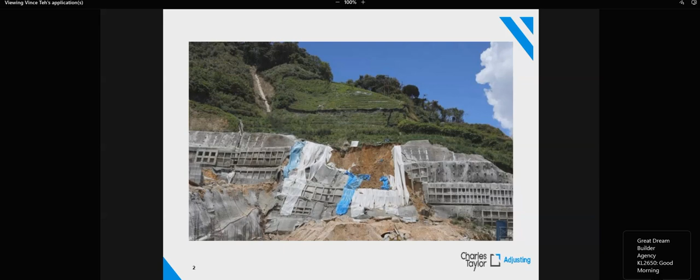Before we start, I'll show you some common engineering failures, construction engineering failures, so that you're familiar. I'll run through examples of CAR losses, then we'll go to the dry part where we explore the policy wordings, and go through some common clauses which your claims department would like me to highlight in the event of claims. I've taken out the case study because it's a bit too long, and the claim handling procedure as well. So we'll stick to the general, very introductory session on losses and policy wordings.

As you know, the weather nowadays in Malaysia is really wild or crazy. It's predictable in the sense we know it's going to come, but unpredictable in how massive or frequent it will hit us. Proper precautionary measures need to be taken. As a consultant and contractor, all these design considerations have to be taken into account. A lot of the time, consultants or contractors use back the standard design from 20 years ago, which might not fit current weather conditions. That's when things go bad.

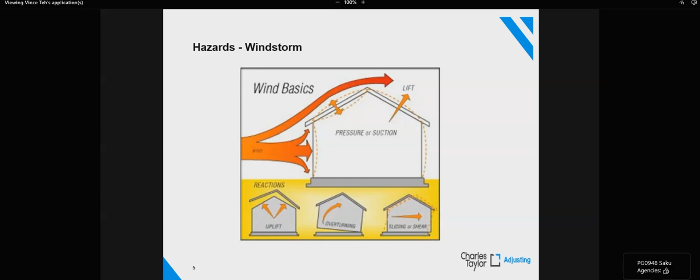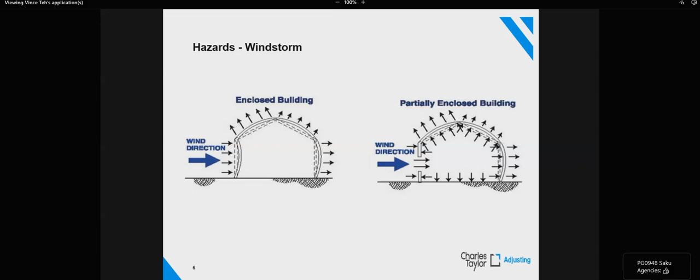Now, for a proper windstorm, this is the theory behind windstorm damage. If you have a closed structure, a completed structure, the wind will be blocked from entering the building, so it goes past the building - this is the aerodynamics of the wind, how it flows. However, if you have an open structure where wind can go in, like uncompleted buildings where some contractors build the roof first, or a shed or car park structure where the bottom is empty with just a few columns and a roof, the wind will easily go in and create an uplift force. That's where windstorm damage can happen.

Next, we move on to the more commonly seen soil movement. This is what we call a third-party claim, because usually the affected parties are actually outside the construction site - their properties are affected by soil movement within the site. The soil movement can be massive - it can cause a sinkhole, subsidence, or just create nuisance vibration and small cracks, which I think is quite common. Most of you might have some experience with this.

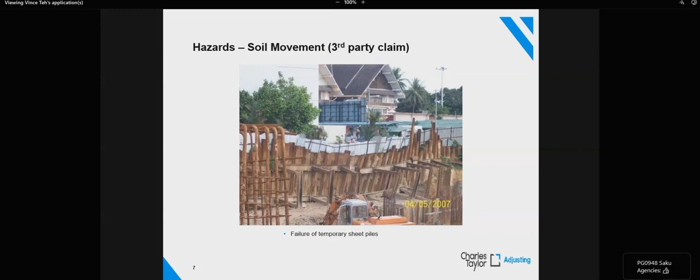From these photographs, you can see inside the construction site, the row of wall - we call this a sheet pile wall - pieces of sheet pile, vertical sheet piles driven into the ground to form a wall. You can see the alignment is already out. The soil movement is created because there's movement to the wall, which allows the soil to move, creating movement on the third-party side. If you look in more detail, you see the sheet pile walls actually have rows of reinforcement - meaning the consultant or contractor probably experienced some movement earlier and already tried to fix this wall. Unfortunately, even with this reinforcement built into the wall, it still moves. So yeah, there's your claim.

Now this is the theory part - I don't know how many of you can understand this. Basically, whether it's a sheet pile wall or a retaining wall, as long as the forces on the retained soil side are bigger than the bottom supporting side, it will create a rotating effect, causing the wall to fail and move.

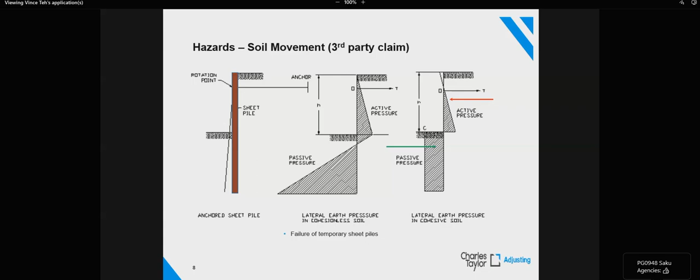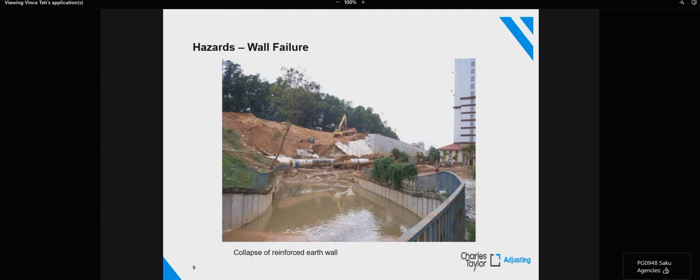So in this claim itself, there are so many parties involved. If you are the agent for the apartment, then you'll be dealing with debris which was washed over from the collapsed wall. Then you will have maybe small flood or a lot of cleaning work to do. So you'll be claiming against the contractor.

But if you are the agent for the contractor, your contractor actually suffered a collapsed wall. This collapsed wall would have caused damage to the third-party apartment, as well as the owner of the twin pipe, the water pipe. So in this instance, it's SYABAS. So there are a lot of things inside this claim.

The causation, the root cause of it, we found it to be a design failure, a defective design of the wall. So the wall was not properly designed, so it failed during construction. But when they started to remove the debris, they found out the pipe had burst as well. So the contractor initially tried to blame the water pipe, to say there was already a leakage earlier, which caused their wall to fail.

For the apartment side, there's no argument, right? They caused damage to the third-party cars, to the apartment, so they have to bear the cost of the cleaning and everything. So the argument was between the wall and the SYABAS pipe. This one required a lot of investigation.

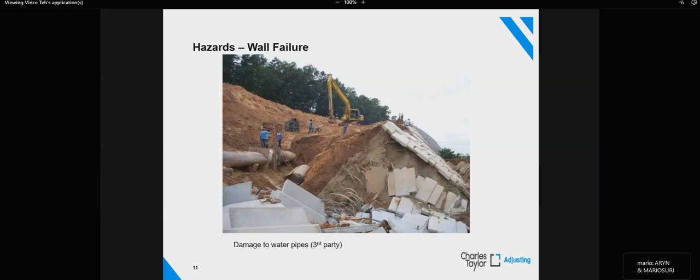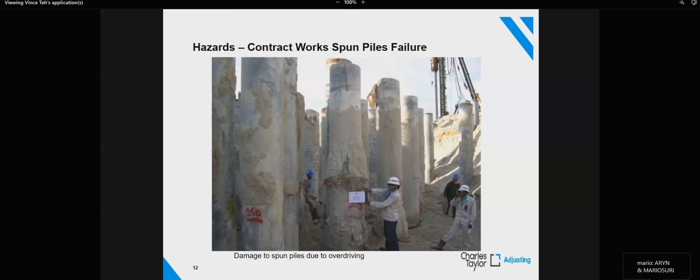Now this is another technical claim. It's spun piles which failed. If you can see the spun pile, the one with the guy standing there, it's deformed. The bottom part, we call it pregnant. The pile is pregnant because it has been overdriven, or maybe when it was driven to the ground, it hit some hard rock material and couldn't go down anymore, but the person on top still didn't know. They still tried to drive it in, and this caused this type of failure.

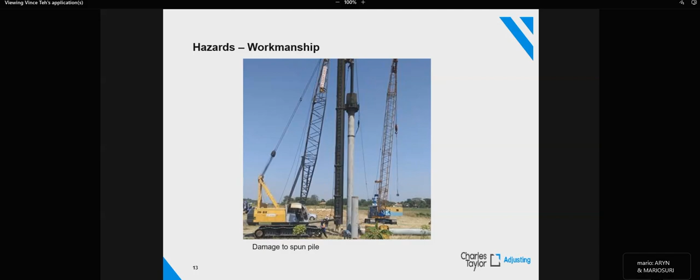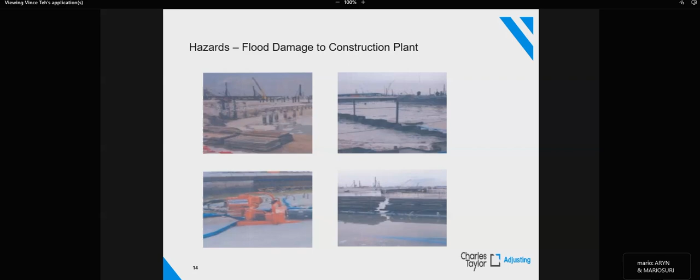I think flood damage is a very common risk we see nowadays. So for CAR policy, we are mostly dealing with flood damage to construction plant as well as contract works. The contract works can be washed away. The construction plant, if you don't move it fast enough, it could be inundated inside the construction site. You see heavy machineries, cranes, excavators, all submerged.

Then sometimes we talk about overflowing of a water channel, overflowing of a river, overflowing of a drain, a monsoon drain. In some areas where you have a construction site, usually they haven't completed the drain, so they'll have temporary drainage, which is usually just an earth berm. They'll put a heap of soil there just to prevent water from going in. So this kind of structure usually is not properly designed, it's just based on their experience. And when there's a more extraordinary rainfall or whatever, it'll be overtopped.

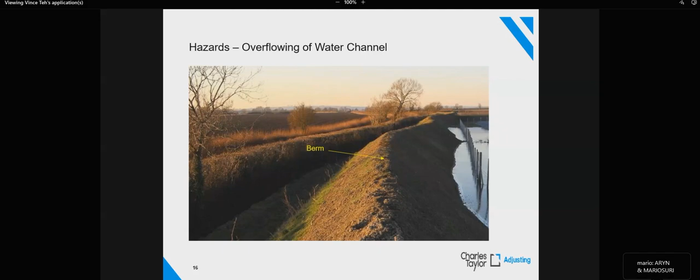So during construction, this was probably in December, during the rainy season in East Coast of Malaysia. The monsoon rain brought down a very heavy volume of water, and the water from upstream gushed down to this downstream area. Along with the water, it brought a lot of debris, like big tree trunks, branches, boulders. All these can cause impact damage and different types of damage to the structure, especially under construction, which is still not a complete structure.

So it's more exposed to all these kinds of risks. That's why you can even have flood damage to a structure in a river. So when you understand it, it's quite interesting how these things can happen. But it did happen, so it's not uncommon.

Then you will have deliberate fire by arsonists at a construction site. Usually when this happens, you can find that probably the contractor has not paid the subcontractors in time, or maybe the workers. So there are a lot of disgruntled parties who will do these things. Or maybe it could be only one disgruntled worker who has a disciplinary issue, who has just been laid off, and they can do these kinds of things.

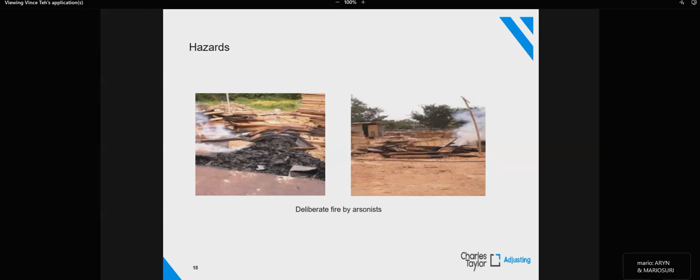So this is a very interesting case where during our investigation, we found pieces of broken glass from a glass bottle. When we investigated further, we actually managed to locate a few beer bottles, alcohol, on site, very close to this. So apparently some workers, after working hours, stayed back there and just chilled and relaxed.

They had a few drinks and smoked, and unfortunately, the cigarette butt which they threw on the ground, during a very dry season, very hot, caused a fire. So it's unfortunate, but this kind of thing can happen.

Then this is an example of a more major construction fire at a construction site. In a construction site, even though it's an under construction building, it looks empty, looks like only a concrete structure which is not so easily combustible. But there are still a lot of construction materials which can cause fire, even with a small spark or small ignition point, like cigarette butts or whatever.

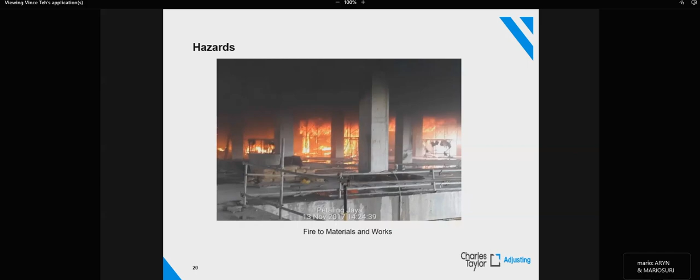So those flammable media can be petrol, gas, all these kinds of things, and all these have to be kept at a different location. So this construction fire can be massive. Once it catches fire, it will be very hard to put out.

Then this is an example of a collapsed tower crane, a collapsed boom.

These kinds of claims were quite rampant probably 7, 8 or 10 years ago, when the China market just opened up with a lot of Chinese manufacturers making tower cranes, which were like a third the cost of the original or previous cranes from US, UK, or Europe. So about 10 years ago, there was a huge influx of Chinese tower cranes entering the country. But unfortunately, during that time, whether it was a quality issue or a QA issue, there were a lot of failures.

Our JKKP, our safety department, actually put a stop to this and banned all these Chinese cranes from entering the country for a few years. So until recently, I suppose with the growth of technology, Chinese cranes are already one of the more reliable ones.

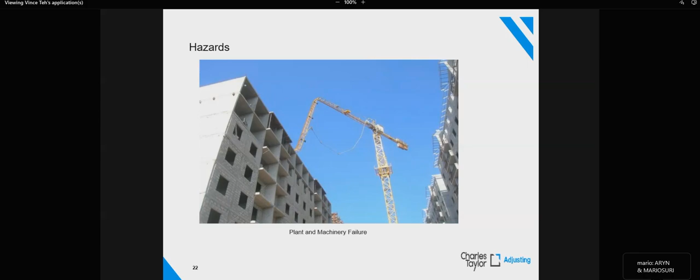Then we have this, which is quite common - collapsed formwork. You have scaffoldings, you have timber formworks before you cast the concrete. Usually this happens when contractor cast concrete, there's loading, and then the formwork starts to fail, the scaffolding starts to fail. A lot of this happens because the contractor actually reuses all these things. We call it construction plant and equipment, because these are the construction tools the contractors usually reuse from one project to another. So at the end of lifespan, these materials will be more brittle, more fragile. If not properly maintained or not properly supervised, all these losses can happen, all these accidents.

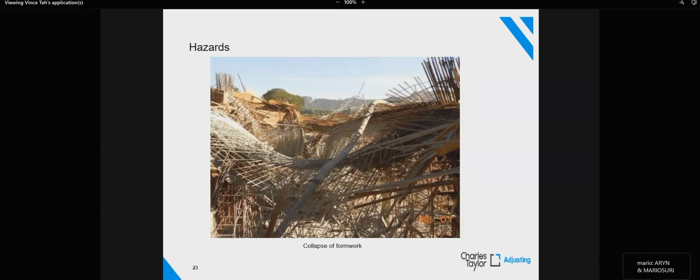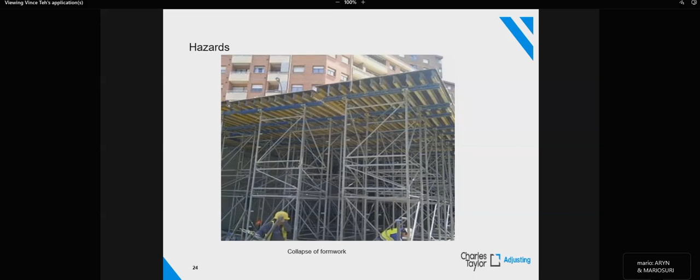So this is an example of a very sturdy, very good scaffolding. This is heavy duty scaffolding and also heavy duty formwork on top. Unfortunately, usually we only see this for mega projects or maybe very high profile, high rise projects where all these costs are already factored in. But for common property construction, housing, or if it's just a normal high-rise condo, sometimes the contractor would not spend so much on these kind of things because these are all temporary works. So you will see a lot of rusted parts, rusted components, which is very prone to all those collapses and failures. So this is another aspect where if you're an agent, if you visit the site and notice anything, you can raise this to the contractor, raise your concern, so that they have something in mind at least.

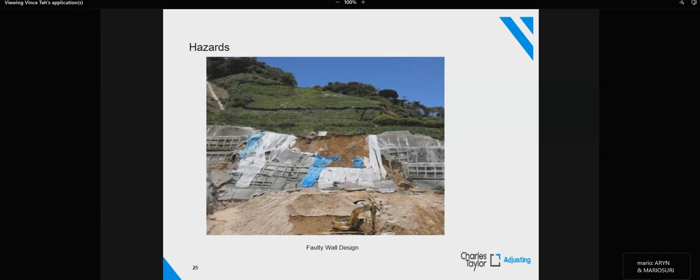Okay, so when we talk about wall failure, retaining wall, there are many types of retaining wall, big or small. This massive retaining wall is a soil nail wall. If you can see the wall comparison with the long arm excavator at the bottom, you will see how massive the wall is. You see the excavator on the middle right of this photo is so small. So this wall is huge, it's 3-tier, right?

And you can see all those rectangle grid boxes there. If you're familiar with construction, a soil nail wall is a smooth structure where they spray some materials onto the wall and then put soil nails in, holding the retained soil at the back, the slope, so you can have a very steep structure. But the grid boxes are similar to the sheet pile example I told you guys - it's actually already a repair, a reinforcement to the soil nail wall.

So from this photo, when we went to site, it was very obvious to us that there were previous problems with the soil nail wall. So the consultant or the contractor had taken initiative to repair it before, put in reinforcement. Unfortunately, due to the steepness of this soil nail wall, the reinforcement put in was too much in this case, too adequate. And the weight of the reinforcements was too big for the soil nail wall to hold, thus causing this slippage failure.

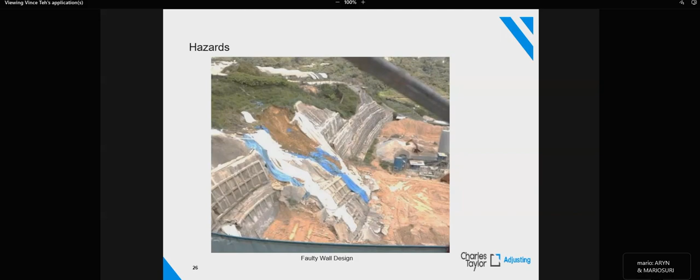Now this is another example of engineered slope failure. I think this is in Bukit Tinggi. It looks like a natural landslide, but in fact it's not - the bottom part is engineered. So engineered slope means work has been done on the slope, whether it's a retaining wall or whether they have cut the slope. So some sort of work has been done to stabilize it or to make it in the shape it is today. And if it's not done properly, you can have failures.

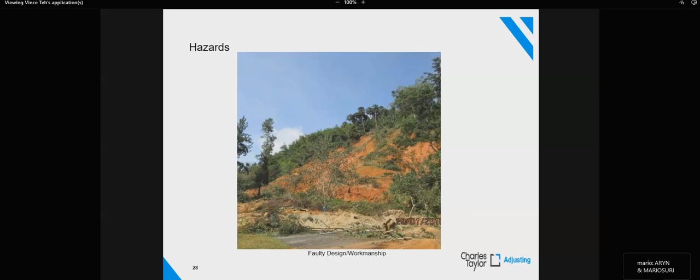So usually when we see this kind of failure, usually the weather cannot run as the excuse - it's either design or workmanship. It's very unlikely that the weather is the cause. Usually the contractor and consultant will blame the weather, but if you investigate further, usually those are not the culprits. The culprits are usually the design and workmanship.

This is another example of a wall failure. You can see that the concrete has fallen, but the rebars are exposed, and the rebars are very clean, right? Meaning that the concrete and the rebars are not gelled together.

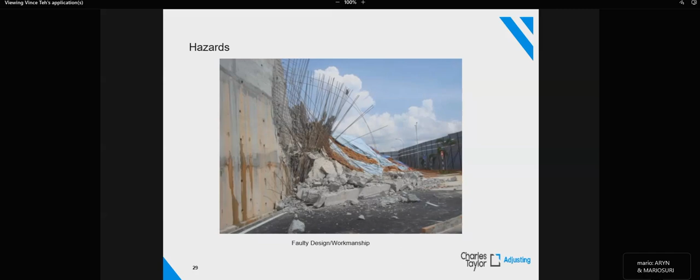So it indicates something wrong with the construction. Usually this is a workmanship issue, but it could be design as well.

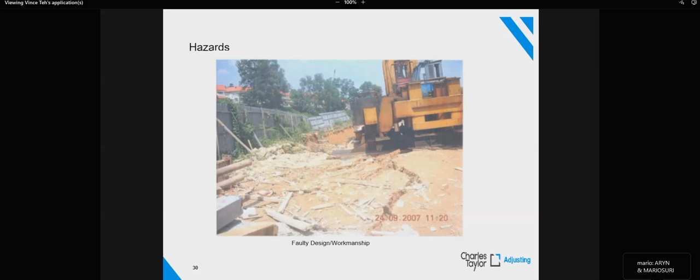I don't know how many of you have received calls from your contractor saying their site has collapsed, there's soil movement, a landslide at the site. But when you go to the site, you don't see any landslide. These are the things you see: tension cracks, the ground subsided. On the other side, the other view, you can see the soil move. So the contractor usually will tell you, 'Wow, there's a landslide at the site,' so they try to claim.

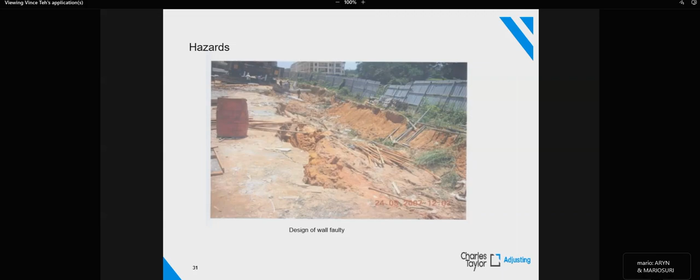But as an adjuster, we usually don't only look at things from one angle. If we go outside, you will discover that this site is actually next to a river. When there's a river, there's water. When there's water, that means the soil there is soft. These things are bound to happen if you don't have a proper foundation for your retaining wall. So true enough, this is what happened: the perimeter retaining wall wasn't designed adequately.

Okay, this is another wall failure. This retaining wall is another type, what we call a crib wall. But again, there are similarities with the previous example: it's immediately next to a pond. Just now it was a river. So when there's water there, obviously the land won't be hard, there'll be a lot of soft spots, soft soil.

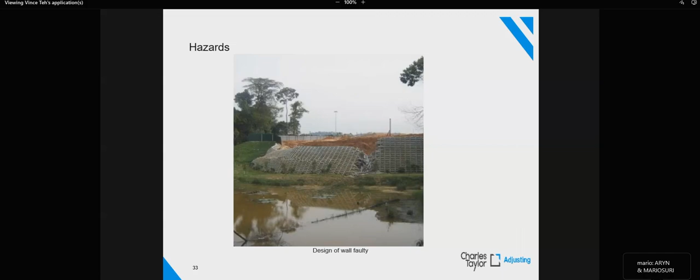In both of these cases, the wall design used standard wall design, meaning for hard ground. The designer probably never went to the site, didn't take into consideration the water, and the water level was very high over there. So you can have all sorts of retaining wall failures, even though you'll be advised that the wall was properly designed by certified consultants, big name consultants, but it still can happen.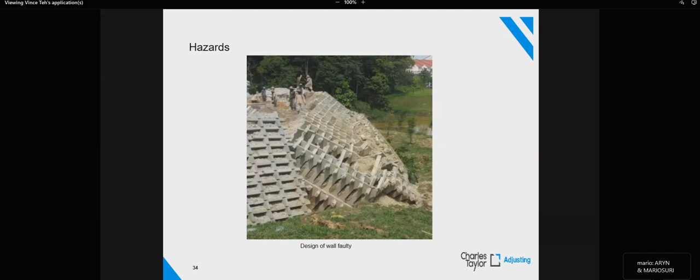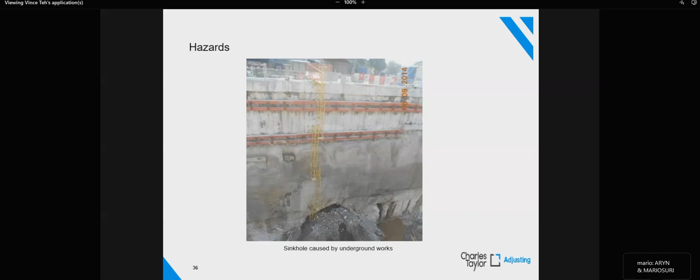Then a more specific, more specialized claim: sinkholes. You don't see it every day, only when you have big basement work, underground works. This one is during the MRT construction. When there's a sinkhole underneath, you can see subsidence on top, because there's a void in the soil. Without the support, the soil on top will come down, and if there's any structure on top, it will come down together.

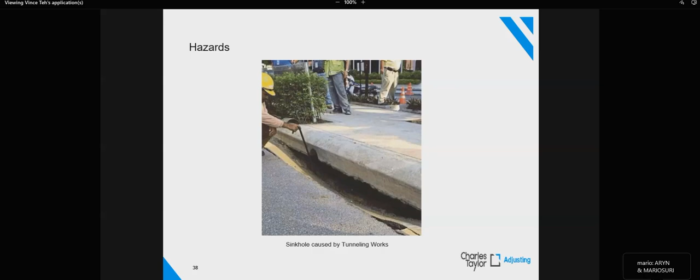This is, I think, quite a famous loss in Bukit Bintang. During the MRT construction, it created a big hoo-ha because it's right in front of Pavilion. Now, how this happened was there was a tunnel boring machine going right underneath that area. The tunnel boring machine goes very slow, drilling the ground and creating a tunnel for the MRT construction. So for this TBM, tunnel boring machine, it will stop every week

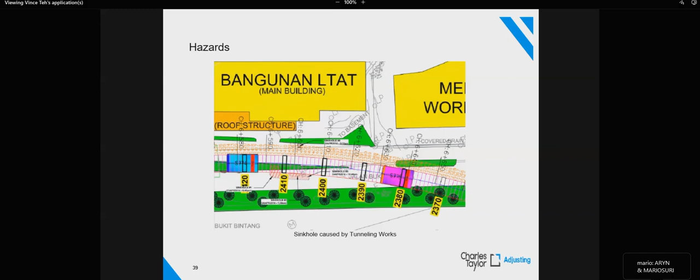for maintenance work, I would say. The normal maintenance work probably takes half a day, where they change oil and so on. But in this case, the stoppage was delayed, prolonged. This tunnel boring machine was stopped there for a few days. When you have an uncompleted tunnel and the boring machine stops with the bentonite running, the bentonite is just a temporary material to hold the tunnel together before the concrete lining goes in. So when the machine has drilled a hole but they have not put in the concrete, and they stop for a while, longer than expected, the soil being held by the bentonite starts to collapse. When it collapses, it creates a sinkhole. This is what happened at this area.

Unfortunately for this case, there was a casualty. There was a worker whose body, until today, we couldn't find. It's a sad thing. For this case, there are also a lot of parties involved: there's the subcon, main con, bearing supplier, subcontractor, consultant involved in the design. So there are a lot of parties involved. I think the entire adjusting industry, all the competitors, are there representing different insurers working on this.

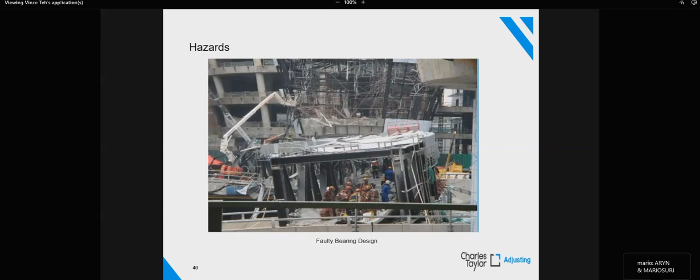You will see this kind of severe movement in areas like Punggol, Banting, where they have a very deep layer of marine soil, marine clay, which is very soft. So you will require a different type of design when you have this kind of soil condition.

Then we move on to some more common claims we see daily. This is underground cables. Usually when our contractor is doing work, accidentally they will damage existing underground works. It can be water pipe, telecom cables, fiber optic cables, TNB cables, gas pipes. So all this can happen, even though precaution has been taken.

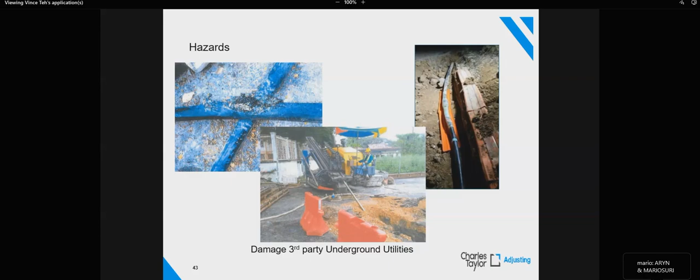Okay, now, so these are the common examples we sort of see daily, right? So now we move on to the dry part, the policy. I hope everyone is still awake. It's only half an hour into the talk.

Okay, so yeah, let's quickly run through a CAR policy. So the policy is structured in a way that on the first page you will have the operative clause. It's usually one sentence or one small paragraph, followed by general exclusions of the policy, what they don't cover in general. Then they'll have a small paragraph telling you the period of cover, once it's handed over it's not covered, those kind of things. Usually nobody pays attention to it except adjusters and the claims people.

So I encourage everyone to go back and look at your policy jacket, not only the schedule, because the schedule is only a summary or some customized coverage you want to put in. The actual coverage, the wordings, is in the policy jacket. So please get a hold of a policy jacket, read through it, and make sure your clients have a copy so that they don't push the blame to you if anything happens.

A lot of times, even brokers only give the schedule to their clients, but it's a good practice to give the entire set, schedule plus jacket, and then perhaps you can run through the jacket to show the coverage with them.

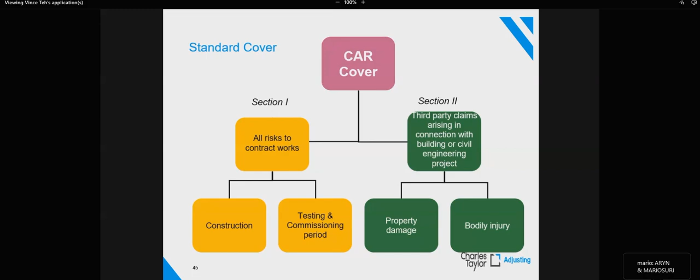For Section 2, it's a liability policy. It covers the third-party claims arising in connection with buildings or your civil engineering project declared under the policy. It covers property damage and also bodily injury. All right, so now we go into Section 1, the contract works. So, the insured parties, who can be insured under the policy?

So in general, it is for any party who has an immediate material interest in the project. For example, under a common construction contract, you have the owner, the principal. Because they want certainty that in the event of severe damage to the works, the contractor still has the financial power to continue and finish the project. So they want the certainty, and that's why they purchase this CAR insurance.

And sometimes the work involves expansion or refurbishing the existing structure. So there will be existing property owned by the principal, which is at stake and can be affected. So the principal will want all this to be covered.

Now, contractor and subcontractor - obviously the name of this policy is Contractors All Risk. It means any risk concerning what the contractor has to bear during this construction period. So obviously they will be the main party holding this policy. Even though nowadays in a lot of projects the principal will try to dictate and purchase the policy for the project, practically the CAR policy belongs to the contractor.

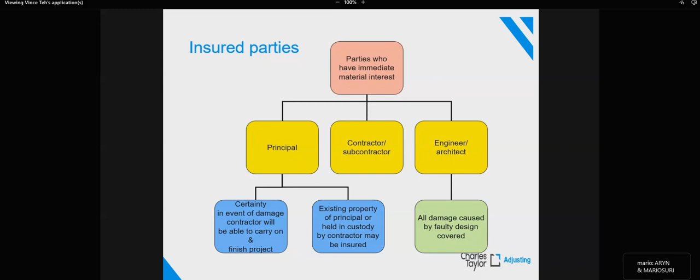Now in a lot of projects, because the contract is worded differently, some are design and build, some conventional. So for design and build, the engineer, the consultant, the architect will be parked under the contractor as well. So in this instance, they will want to have cover also - they want to make sure all the damage caused in the event of their faulty design will be covered. So all these parties will have an interest in the policy. It's just a question of whether they pay sufficient premium to cover these parties.

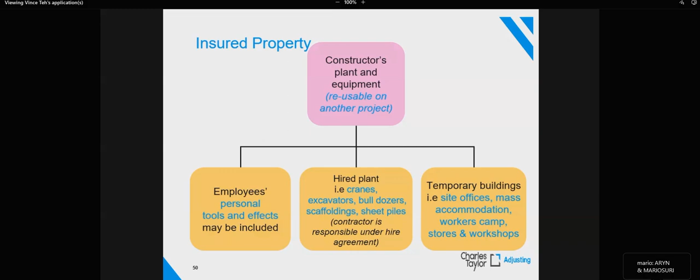If there's a change of design, method of construction, it is better for your client to inform you so that you can inform the HQ, because the risk might be different from a concrete structure, concrete foundation to a timber pile. The risk is very different, okay? From a metal frame structure to a concrete frame, the risk is different.

So it is very important, if there's any major change, even small change, I will urge you to speak to your underwriters, see what's the impact, because you might not know how big the impact is, right? So gather all the information. Perhaps it is good practice to communicate with your clients frequently, so that if there's any material change of risk, you are aware and you can inform the underwriter accordingly, so that you won't be penalized when things happen, okay?

Now, another important condition is immediate notification. So under the policy, the standard is 14 days. In some policies, you can increase it to 30 days, 60 days, 90 days, right?

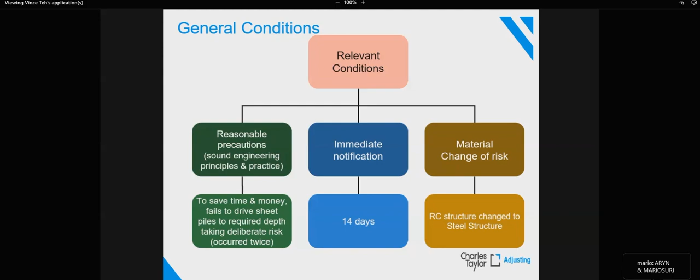Okay, now this is the gist of the coverage, the insured risk. The wording says unforeseen and sudden physical loss or damage occurring during the course of construction. So the words must be unforeseen and sudden, and there must be physical loss or physical damage. Physical damage means if there's a construction defect, it is not damage.

I can't remember whether I have this slide later. There's a big difference between defect and damage. This is what you need to tell the contractor. Defect means they didn't construct properly, it's their problem. Physical damage means their work is actually damaged by something.

And that something must be unforeseen and it must be sudden. If it's a gradual damage, like gradual subsidence, because they don't do a certain thing and it slowly happens, it will not be covered under the policy. This policy specifically says the damage must be sudden and unforeseen.

Now, from what reason? It can be from whatever cause not specifically excluded. So as you know, the contractor's all risk policy is an all risk policy. Technically speaking, it covers everything, all risk. But then there will be a long list of exclusions, which will exclude things the underwriters don't want to cover. So this is the wording: unforeseen and sudden physical loss or damage from whatever cause not specifically excluded.

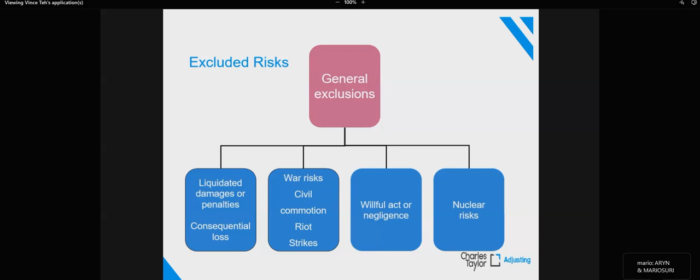So willful act or negligence is something - it's not fun going there. It's a sensitive issue, so be sure to advise your client on this. If they know something is going to happen and don't do certain things, then it's not covered under the policy, because it's already their decision to take such risk - they already assume the risk, so it's not covered. The word willful is very critical. Willful act or willful negligence is different from normal negligence - normal negligence is an accident.

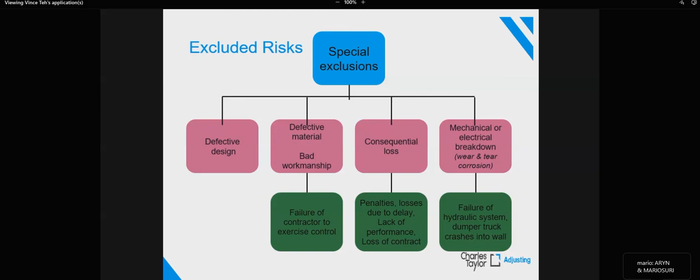Now these are the special exclusions. You have defective design, which is everyone's favorite subject - I will talk about this later. Then defective material or bad workmanship, for example failure of the contractor to exercise control. Consequential loss, like I said - penalty losses, lack of performance, loss of contract, opportunity cost - these are not covered. Mechanical or electrical breakdown of machines are also not covered, because for those special equipment, usually they have their very specific machinery cover. So this type of risk is not covered under the CAR policy.

Everyone still okay? Still can follow? Okay, only 1 hour in. Now, defective design, right?

Everyone is interested in defective design because most of us understand that defective design is not covered. Which is true - Exclusion C, general exclusion C, says that anything to do with defective design will not be covered. So you must know what is defective design.

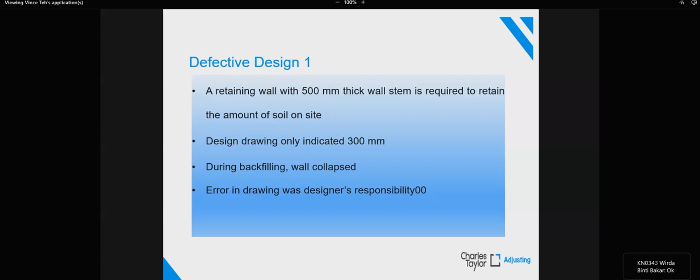So here's an example. A retaining wall with 500mm thick wall stem - wall stem means the vertical, standing part - is required to retain the amount of soil on site. However, the design drawing given to the contractor only indicated 300mm. So the contractor, being a contractor, just constructs according to the drawing, so they build 300mm. After completion, they backfill, and the wall collapsed. When we investigate, we find the drawing is wrong - it's only 300mm, but the error in the drawing is actually the designer's responsibility. So we consider this a defective design, because the design provided only 300mm, but in fact you might need 500mm. The contractor just did the job, so we cannot blame the contractor - this is a design issue.

Example 2: when you have slope strengthening works designed by the consultant, the contractor again constructs based on the design drawing provided. Then the slope failed when it was almost complete. It was found that the soil condition estimated by the design consultant was too optimistic - let's say the consultant assumed the soil is very hard, but in fact the soil on site is very soft. Then it is not a contractor problem, it's a design issue. Clear?

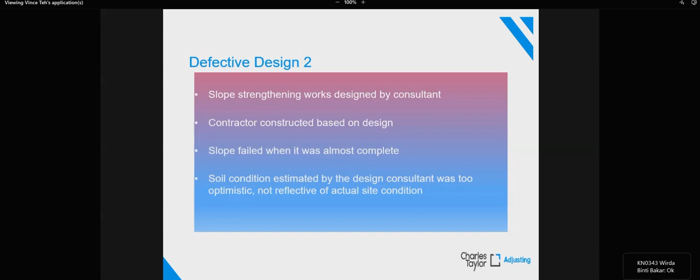So I showed you some examples of the difference between defective design and defective workmanship. Now this part is a bit confusing, so I hope you guys can follow. If you have scaffolding which collapsed during concrete pouring, would it be defective design or defective workmanship?

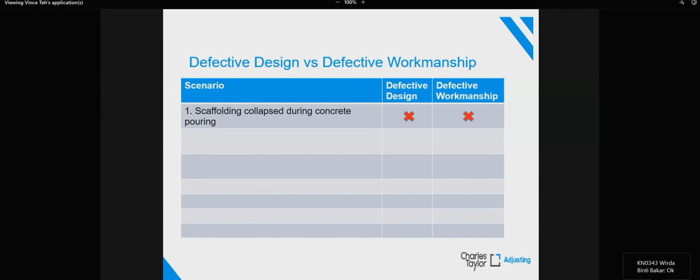It can be both. We have to be more specific in our question. Is it because the contractor's worker did not install properly? This is very clear, right? If they did not install properly, then it's workmanship, right?

Now, if the contractor purposely left out the bracing to save money, saying this component, I don't need to put, looks okay, then we can save a lot of money - this is design. Why is this design? Because it's their intention to take out this component. It's not that they accidentally did something wrong without their knowledge. They intended, they made a decision to take this out. So it's their intention to have this type of inadequate design, and they intended so. That's why it's considered as design.

Now, when you have a retaining wall collapse, again, it can be either design or workmanship. So you have to go further and ask sharper questions. Is it because there's no weep hole in the wall? If no weep hole, it means design - unless they come and tell you my worker didn't read the drawing properly, then it's workmanship. If it's in the drawing but the contractor forgot to install, then it's workmanship.

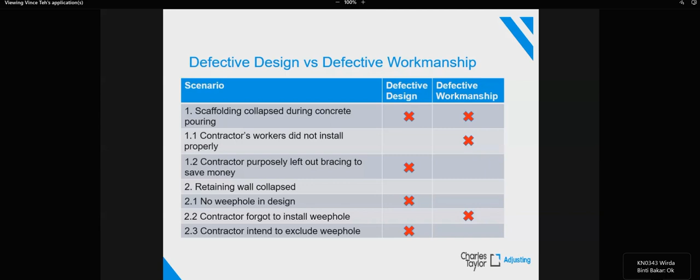So in short, a defective design can be said to be an intention, a plan, a method devised by any party, not only the consultant. A lot of adjusters in this market take the view that design should only be the consultant's design - if anything is done wrong by the contractor, it's workmanship.

This view can only hold if you are working in the Malaysia market. If you have a risk big enough that requires regional reinsurers, or reinsurance in Singapore, to come in, they will not have this view. They will not say any fault by the contractor is workmanship. It's not like that.

A design could be by any party, because the contractor, the subcontractor also can have their own design, temporary work design - so it's still a design. So whatever practice is in the local market, some of you might be in the industry for 30 or 40 years, and you might have previous claim experience where it's different from what I say. I can only tell you that whatever is practiced in the local market might not be acceptable in the regional market.

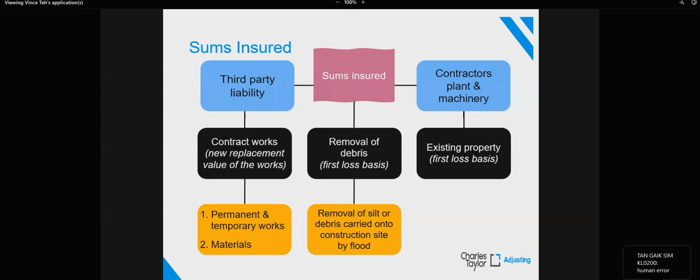Now, next we move on to the sum insured of the policy. The sum insured will include for the contract works, and also you may be able to include removal of debris. Usually it's on first loss basis, it's on the amount, or even existing property can be covered.

And then the extension of the coverage. What can you extend to cover? You can cover maintenance period, expediting expenses. You can cover even the architects and surveyors fee, right? Faulty design can also be extended to be covered. But in normal policy in this market, I would say for faulty design cover, it's usually only the resultant damage. But under some bigger projects, they will have different wordings for design.

And contractors' plant and equipment, so even that can be extended to be covered. So obviously you have to pay more premium, right? And existing property, it can be covered under Section 1 as well. So it's bad advice to tell your insured existing property is covered under Section 2. It's not. It can be covered under Section 1, okay?

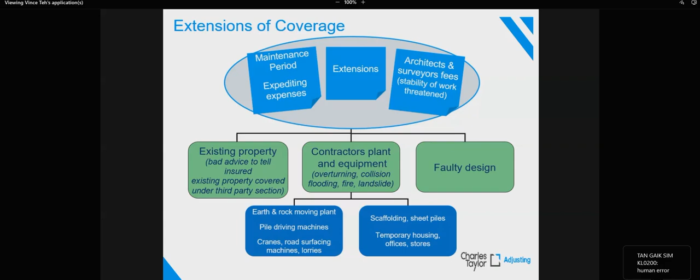Now, so what is actually contract works? The permanent works and temporary works. It's actually works to be executed, all sorts of works. So it can be the construction and erection works, including the temporary works. It can also be the testing and commissioning of your machineries. Let's say you have a chiller for your high rise, all these require testing and commissioning.

And it can also be the maintenance part, because during the maintenance period, after the work handover, the contractors still need to go back to rectify the defects. So when they go back to rectify the defects, they carry a risk also, a risk of damaging the completed works. So this can be covered.

Now this is usually a very confusing part, but it's good for you to make it clear. The CAR policy duration is the contract work period plus a testing period. It starts from the commencement of work and ends when the certificate of completion is issued. That means the contractor's work is finished, they can leave the site. So the contractors' all risk policy will technically finish when the contractor moves out from the site. That means once they are out of site, they don't have any risk on site anymore. So that is the intention of the CAR policy.

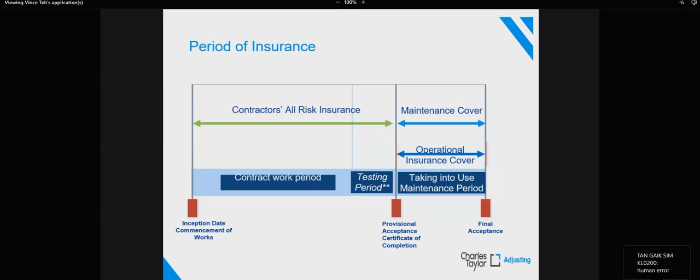The maintenance cover is actually very, very limited. This is what I want you guys to be clear. The maintenance period, even though that period is listed in the policy schedule, it doesn't mean the full coverage is given for that period. It is very limited, okay? I'll show you this, the maintenance period.

Because maintenance period is when the contractor has completed their work and moved out from the site, the coverage is only limited to visit maintenance, damage occasioned in course of operation at site during the maintenance period for the purpose of making good defects. So they are called in by the owner to say, hey, this piping was not done properly or the plaster was not plastered properly, you come back and touch up. So when they come back, there's a risk to damage other stuff. This is called visit maintenance.

Now, nowadays, I suppose all CAR policies will be given for free the extended maintenance cover. So extended maintenance cover covers only two things. It covers the first one, visit maintenance, the contractor's risk when they go back to touch up, to make good the defects. Another portion is it covers damage arising from causes occurring during the construction period. That means there is already some damage which was caused during the construction period, but nobody noticed it, and when they hand over, everything was okay.

So after handover, during this 12, 18, or 24 months maintenance period, only that thing failed - that structure failed, that pipe burst. And you can trace back to the construction period, then it's covered. So the extended maintenance cover actually only covers these two things.

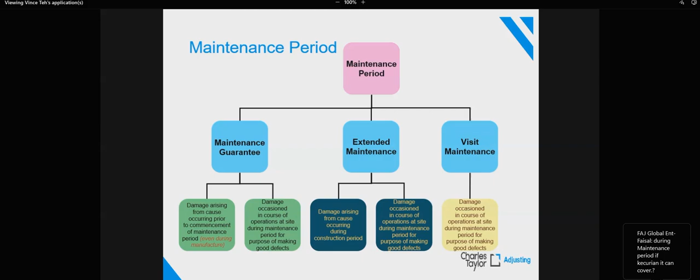So the most common one is extended maintenance. Be very clear, extended maintenance cover only covers two things, not the full coverage as per your standard construction period. Now, just to show you some examples of loss during the maintenance period.

Let's say we have a water distribution pipe which dislodged during the maintenance period and damaged the completed works. Let's say it's a shop, let's say it's a restaurant. So after completion, the people move in, the restaurant starts operation.

Then suddenly your water distribution pipe dislodged and water came out and damaged all the kitchen cabinets, the kitchen features, which were constructed under the project. So when the adjuster goes in, they found that the band was not tightened properly during the construction stage, causing the leakage or the burst. So this causation can be traced back to a fault during the construction stage. In this instance, this will be considered under the extended maintenance cover.

Next, we have a wall collapse during the maintenance period, and it was found that it was due to the contractor's poor workmanship on the drainage blanket. If you don't know, drainage blanket is a component of a retaining wall. So it's due to bad workmanship on that.

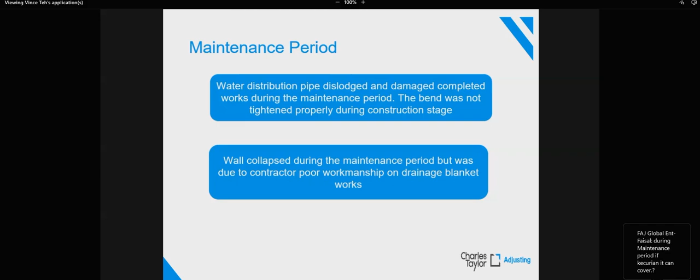So if you don't understand, again, don't worry, your adjuster will understand. So be sure you work with your client to provide all information, and then you can have a very fruitful and very transparent discussion with the adjusters.

Now we move to the more common clauses we see - the designer's risk clause. I suppose most policies will have this nowadays. So it is to revise the wording of exclusion C.

Exclusion C is very, very wide. It will exclude everything related to defective design. There's no consideration at all for anything - as long as it's defective design, the whole claim is thrown out.

So with a designer risk clause, sometimes you call it a buyback clause, you change the wording. How do you change the wording? You actually replace exclusion C with this wording: the cost of replacement, repair, or rectification of loss of or damage to items due to defective material and/or workmanship and/or faulty design. So it covers a lot of things.

But this exclusion shall be limited. It's still an exclusion, so the exclusion is limited to the items immediately affected by the faulty design, workmanship, or material. And shall not be deemed to exclude loss of or damage to correctly executed items resulting from an accident due to such defective material and/or workmanship and/or faulty design.

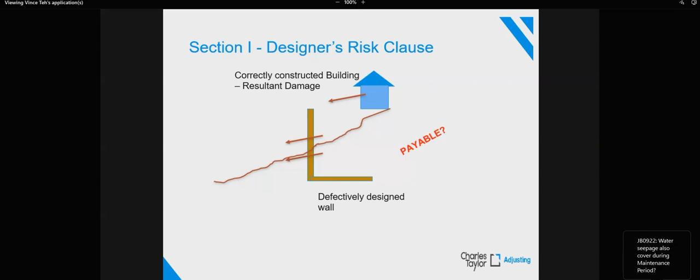However, when you have a situation, especially on a highway, where you have soil foundation and piles, you found that the piles were defectively designed and caused problems on the embankment on top. Let's say they construct a highway. The pile failed and the highway on top suffered subsidence, cracking, or even collapse. So the highway on top is actually a resultant damage, and the piles below are the defectively designed piles.

If we follow the theory in this example, the resultant damage should be payable. So the embankment should be payable, right? This is the easiest way out. Some insurers also like to use this method to say we exclude the piles and we only pay the embankment.

Now, this works only until some smart reinsurer asks a question. They might come back and ask, how are you going to repair the embankment? If you say it's a resultant damage, how are you going to repair it? Obviously, to repair the embankment or the highway on top, you have to remove what has collapsed, and you have to fix the defective pile first. The pile is wrongly designed or too small.

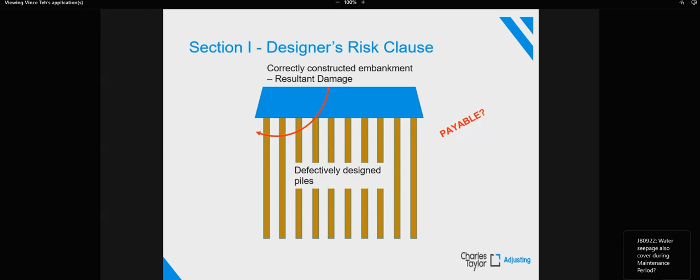Now, this special condition concerning theft prevention is very, very crucial at the moment, because nowadays most insurance companies will impose this, since theft cases are too rampant. Usually we have this theft prevention, either as a special condition or sometimes as a warranty. A warranty you absolutely must follow - if you breach it, they can throw out the claim. A special condition is also very strict, but there's still a chance to talk.

Now usually under this list, you will have the project site must be under surveillance, or you have security guards for 24 hours, and it will require patrolling of the site. Usually the wordings won't specify the interval of the patrol, but some do, so if they have, you must advise your client to follow strictly. They must have logbooks for the security guards to tick when they have carried out the patrol. Some even have those scanners, the touch point - those are good, they show that you have complied.

And when we say security guards, when the policy specifically says security guards, it means it must be a licensed security guard. It cannot be your own worker, it cannot be those gangsters you employ. Cannot.

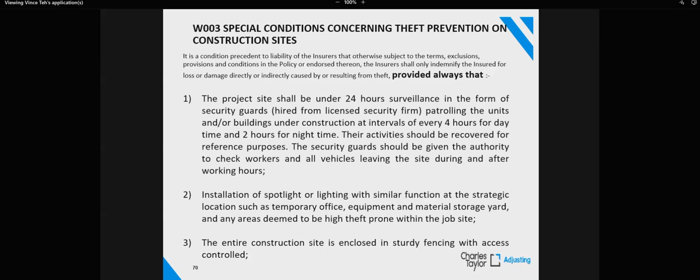Now some of these special conditions also require you to have only 1 or 2 entrance gates. Because some sites are very big, they can have 3 or 4, but usually they close all, especially at night, and only leave the main one open. So which is a good practice, that one.

Now, I think in recent years, the 5th condition has been put inside: the materials should be delivered on a need basis and installed as soon as possible. That means the contractor cannot, one shot at the beginning of the project, put all the materials there and then use it for 1 year. This is not good practice because it will attract a lot of theft incidents, right?

Either from outsiders or even their own workers, especially on the high theft items such as cables, copper, steel - all these are high value items. So some, we even see the window frames, aluminium window frames, all these are stolen, right?

So all these materials should be kept in stores with secured padlocks, right? So worst comes to worst, it must be locked. Even though we know as a contractor, as engineer, we know those small padlocks are actually useless - with a knock you can open it. But since the policy requires you to do so, just do it. Whether how effective it is doesn't matter, because it's a special condition or a warranty. Just comply, understand? Just comply. Don't give chance to any party to throw out your claim because of all these small things. It's very easy to comply only.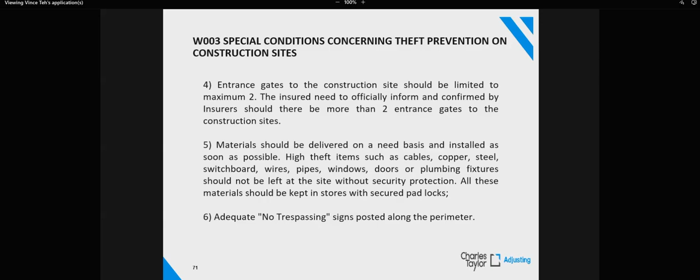So to have proper theft prevention, proper design even though it's temporary works, proper housekeeping. Now, this theft part is what your claims department would like me to highlight to you guys. So with or without the special condition of theft prevention, with or without the warranty for theft prevention, under this general condition, this is in all policies, you cannot run.

Make sure you sit down with your contractor and tell them to ensure the site is fully hoarded up, don't have openings. If you have openings, cover it before the adjuster goes in — you didn't hear it from me. The hoardings should be sturdy and without openings or cuts.

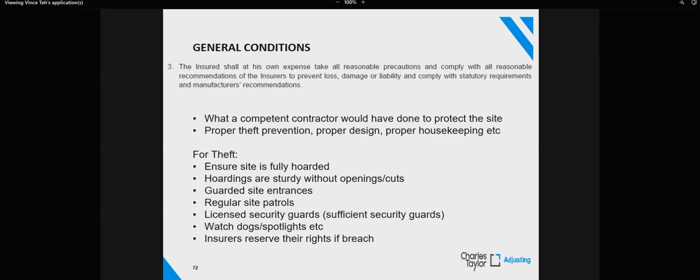Please ask the contractor to inform you guys immediately if anything happens, by any means. Just inform — it can be a phone call, but one bad thing about phone calls is you don't really have a record, the evidence. So a WhatsApp, a message, or an email is good enough, because if anything happens, you can still show the insurer, hey, I have done this, I've informed you. Whether you take action or not is another problem.

Now the bad thing is if the insured WhatsApps you, emails you earlier and you miss it out, that creates a problem. Then it's not the insurer's fault, it's your fault, so you have to be careful with that. So it's good practice to tell the insured to inform you by all means if anything happens, big or small. Then as an agent, you can advise them whether it's covered or not, whether they should lodge this or not, or if it's straight out not an insurance claim, then no point putting it in. But if you're not sure, please go to your claims team — I bet there are a lot of people there who can help you.

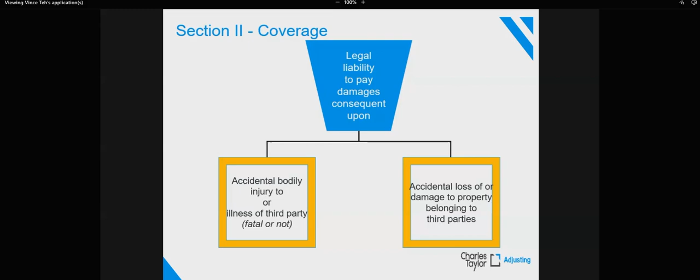Third-party liability coverage is legal liability to pay damages consequent upon accidental bodily injury to or illness of a third party, fatal or not. But the more common coverage is the accidental loss of or damage to property belonging to third parties—so third-party property damage, in short.

So what are the special exclusions? It includes cost to make good anything covered or coverable under Section 1. So anything covered or can be covered under Section 1 will not be considered under Section 2. So principal existing property for Section 1 can be covered under Section 1, so it won't be considered under Section 2.

Property belonging to or held in care, custody or control of the contractor, principal, or other firm connected with the project—so PEP. Any agreement by the insured to pay any sum unless such liability would have attached also in the absence of such agreement—these are contractual obligations, not covered under the third-party liability section.

Damage to property caused by vibration or by removal or weakening of support—this is standard wording, it is not covered. But usually in the policy nowadays, you have a special condition, a special clause to cover this.

Accident caused by vehicle licensed for general road use is not covered, because if it's a vehicle licensed for road use, they would have motor insurance to cover all this comprehensive liability. So under the CAR policy, it won't pick up.

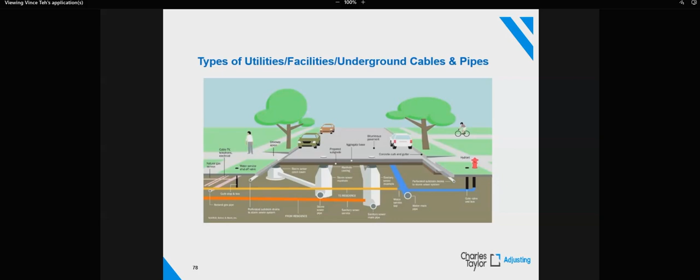So types of underground pipes and facilities, as I mentioned just now: you can have gas pipe, telecom cables, either copper cables or fiber optic. Fiber optic could be Time.com, could be Maxis, could be Digi—now no more—Celcom, Unifi. All these can be seen underground. In certain places you have gas pipe, sewage pipe, Syabas pipe—all these different utilities.

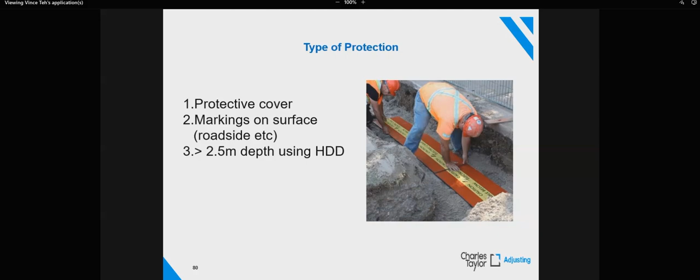For underground cables, usually the owner, when they lay the cable, will have a protective cover. So if you're excavating from the top surface of the road, when you hit something, it will usually hit the protective cover first, technically speaking. But in actual fact, in a lot of areas, especially old cables, they don't have this, because this protective cover is something quite new, I'd say for the last 15, 20 years. Any old utilities before that wouldn't have this. So if your contractor does work and starts excavation without taking precaution, they will hit the cables directly because those cables are not protected.

So other than open excavation where you have an excavator or backhoe excavating from the road surface, a lot of times we also hear the contractor say HDD, horizontal directional drilling - damaged by the HDD. So what is HDD?

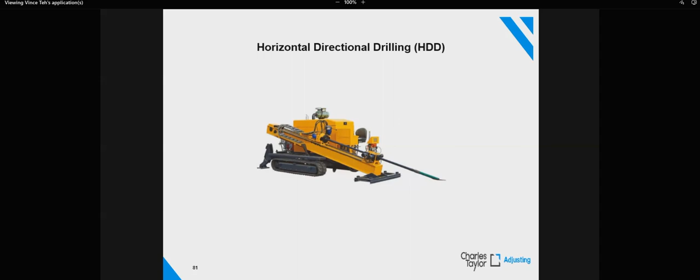HDD is a machine which punches a small reamer drill head through the ground, from top to bottom. It punches through the ground, follows the design alignment, goes to the other end, then changes to a bigger reamer head, the drilling head, and comes back again, then changes to another bigger one. So it goes left, right, left, right, until they get the hole big enough for the cable. This is all conducted underground - only the machine is on top of the road. Everything is underground, you can't see anything.

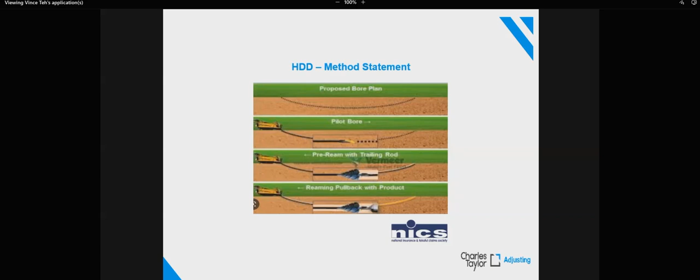Hold on. So, another view of the HDD method statement.

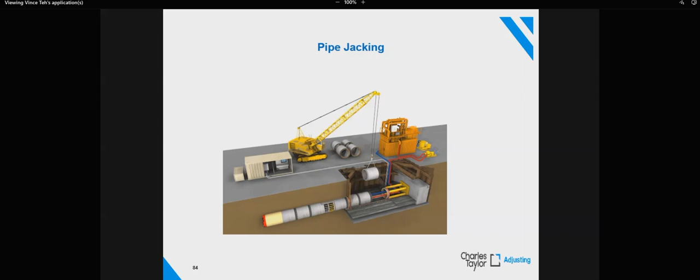Other than HDD, you also have pipe jacking - this is for bigger pipe. It's also underground. You excavate an entry pit, then you push - you have a hydraulic jack to push the pipe section through the tunnel. All this can cause underground cable damage.

No sound, can you hear me? Somebody said no sound. Yeah, we can hear you. I didn't believe those agents saying they have no sound. You can just exit and rejoin.

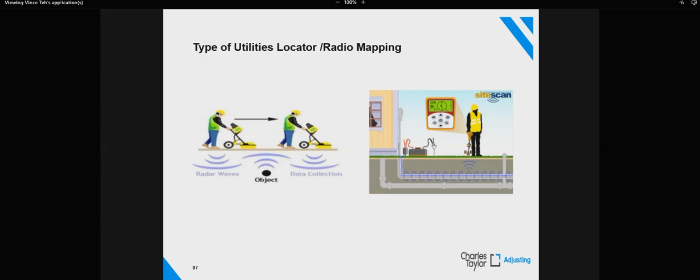Most contractors, even though they say they have done the mapping, it's not done properly. So it's like rubbish in, rubbish out, right? Whatever they do, what they give you is not reflective of what is actually on site.

In actual fact, for ultrasound, you can detect even the layers, how many layers, how deep. A lot of contractors in Malaysia will tell you, hey, this detector only detects metal, I cannot see fiber optic. But if you have the proper equipment, you can actually see it. If you know how to read the data, you can know there's some obstruction there, it could be cable, it could be fiber optic cable.

But most of the utility mapping companies or so-called specialists leave the work to be done by their workers, usually foreign workers. So to them, if it's not a glaring metal object, they say there's nothing there, maybe it's just the soil. So they don't pick up anything, and they produce a rubbish mapping drawing. So sad to say. This is something we can educate the contractor on, to have more precautionary measures and not rely blindly on the mapping drawing.

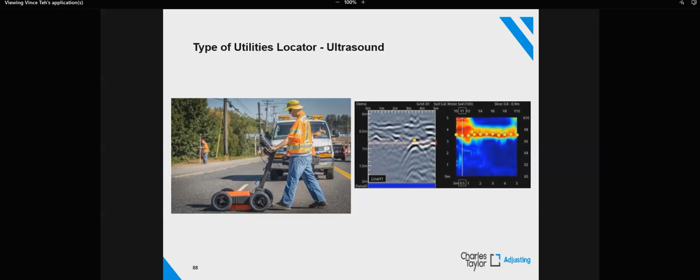Now, currently, our government has taken some initiatives, not to stop, but to reduce the occurrence of these claims. Previously, they had a platform called Call Before You Dig. Many authorities are using it - Fiberail, Time, Maxis, Telekom, Celcom, basically all the communication companies are using it. So you call before you dig. But I believe this is only in the Selangor area.

Then in the recent 1-2 years, starting last year or the year before, the state government has taken some initiative called Corridor Utility Malaysia. This is an initiative by the state government where they gather all this underground information, and a contractor can go to them and check whether at the area they want to work, there are any utilities or not. But unfortunately, this Corridor Utility, as of last year, only 4 states in Malaysia are using it - Selangor, Penang, Johor, and either Pahang or Terengganu.

So not all states are using it, but for those with major development, like the few big cities I mentioned, they have this. So it's good that you tell your contractor about this, so if they have work there, they can check with this Corridor Utility. You can Google it and get more information from the web.

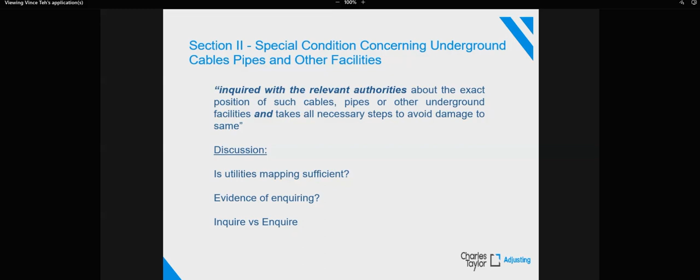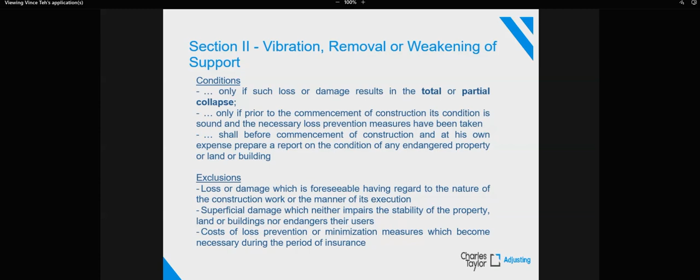Some discussion: if cracks develop everywhere in the building - see-through cracks, wide enough that you can see through the wall - but there's no total or partial collapse of the wall, do you pay for it? The answer is no. But current market practice is a bit lenient. It says even though there's no total or partial collapse, if the cracks could be structural and wide enough, and if you have an independent consultant certify that this building is not safe for occupancy, then most underwriters in this market will consider paying this claim.

So make sure you work with an adjuster - they will know what to do.